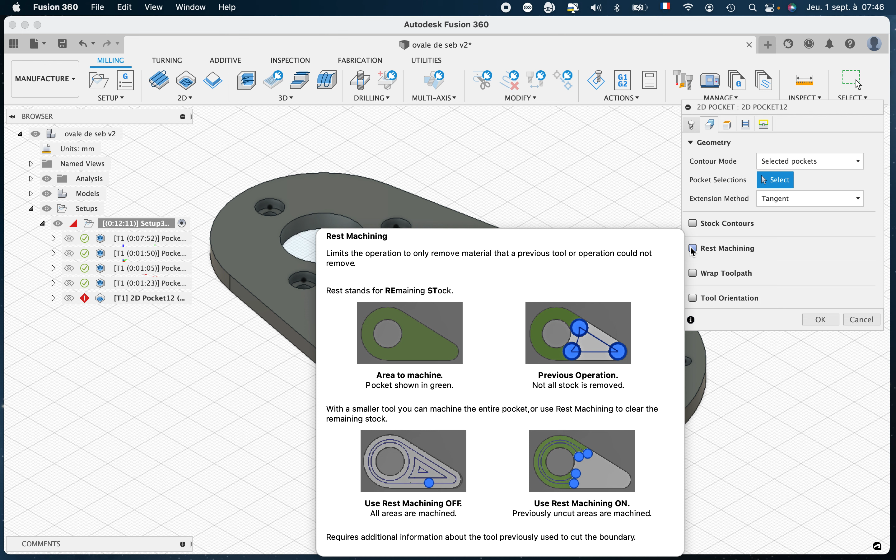For that, you first try to use two 2D pocket operations, and for the second 2D pocket operation with the 3 millimeter, you try to click rest machining, okay, to tell the computer don't do the job again where it has already been, okay, but it doesn't work, and it will never work. It will send you an error message.

You will search the net 10 hours, and you won't find any solution to avoid the error message until you find, like I did, messages on forums that tell that it doesn't work, that rest machining doesn't work on Fusion 360. So don't do it at all.

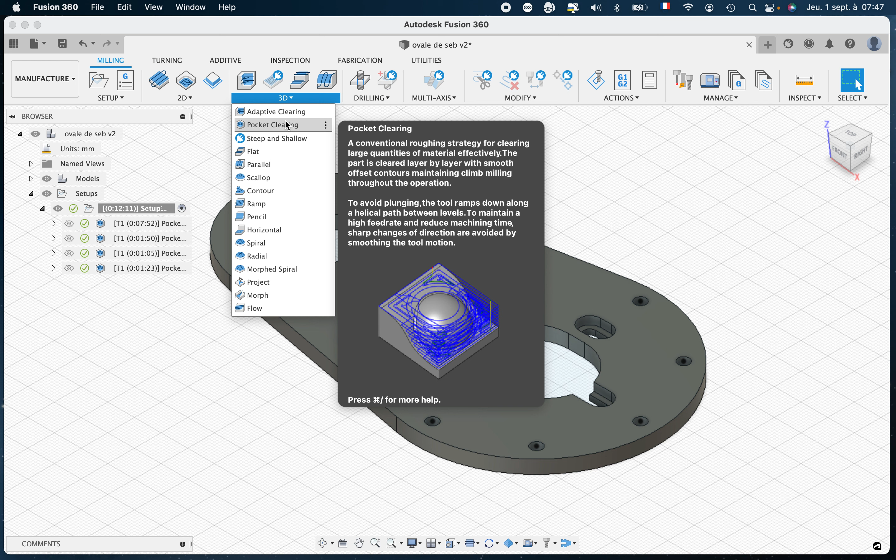Okay, I'm trying to cancel, and use only the pocket, the 3D operation, pocket clearing, and you will see if we're editing the second operation that rest machining is there and is working. You can choose rest machining from the previous operation, and it won't mill the part of the job that has already been machined, and you will save time, of course.

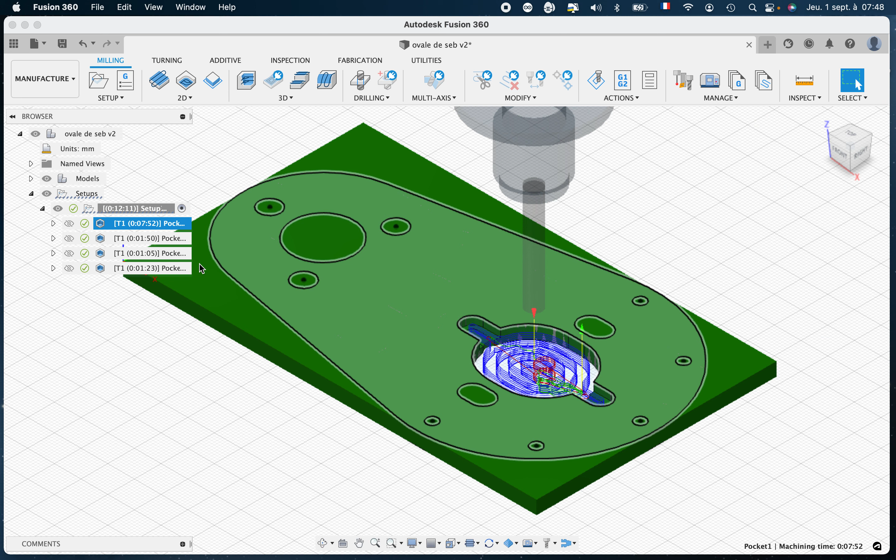It will work. So you just have to select exactly the same milling zone in the two operations. The first with no rest machining, okay, and in the second 3D milling operation, you will select exactly the same zone, okay, with this selection in this box and clicking on the edge of the zone, and you click rest machining from previous operation, and it will work, okay.

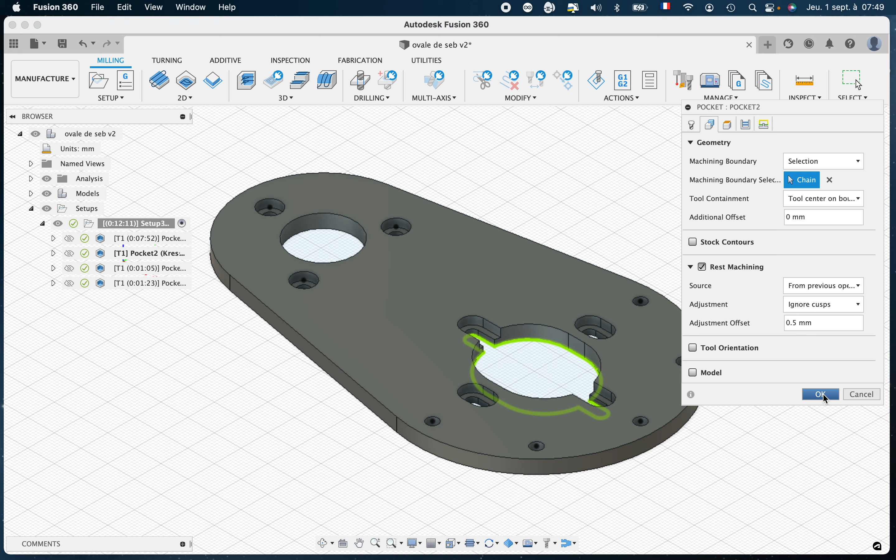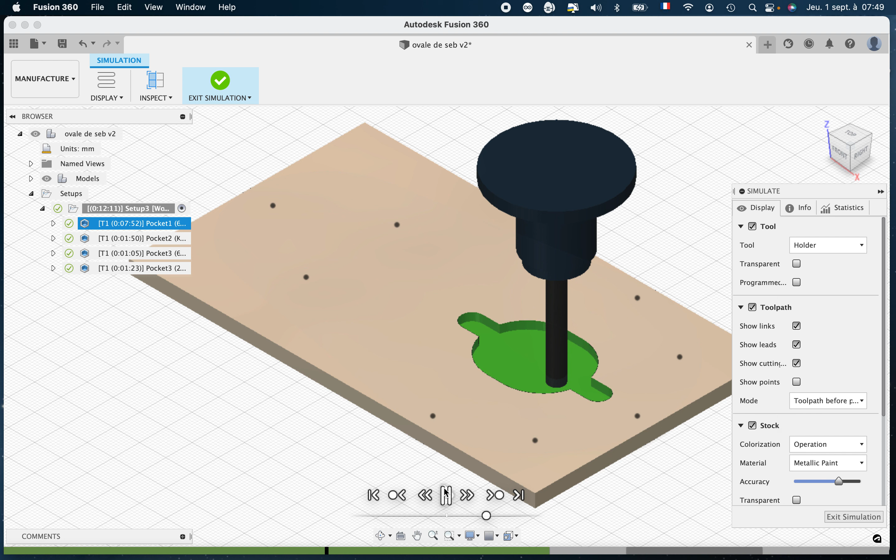And if we try to simulate it, we will see that it will work. Okay, let's begin from the beginning. So action, you see it removes aluminium everywhere the big mill bit can pass. And after, you will get the second small mill bit that will go only in the slots. Up, up, stop. So it works.